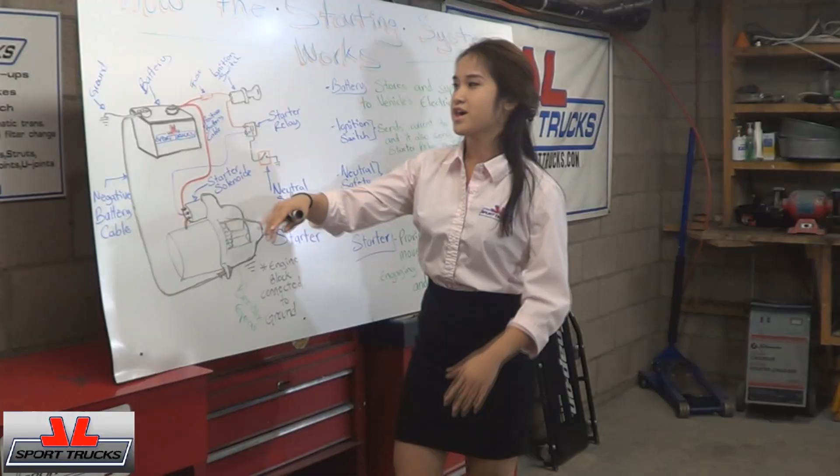This is Jade, and I'm going to be explaining how the starting system works. So first we're going to start off talking about the diagram over here. We have the battery, the ignition switch, the starting relay, the neutral safety switch, the starter, the starting solenoid, there's going to be the Bendix gear, and then of course the negative and the positive battery cables, and there's going to be the thicker one and the smaller one that we're going to be talking about.

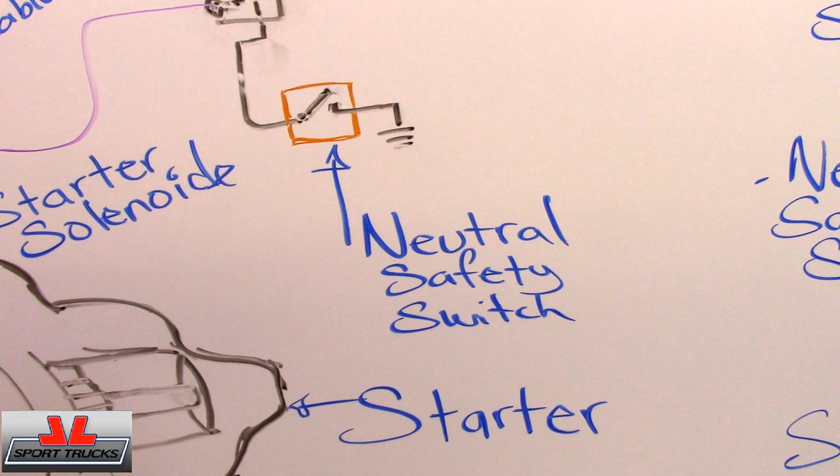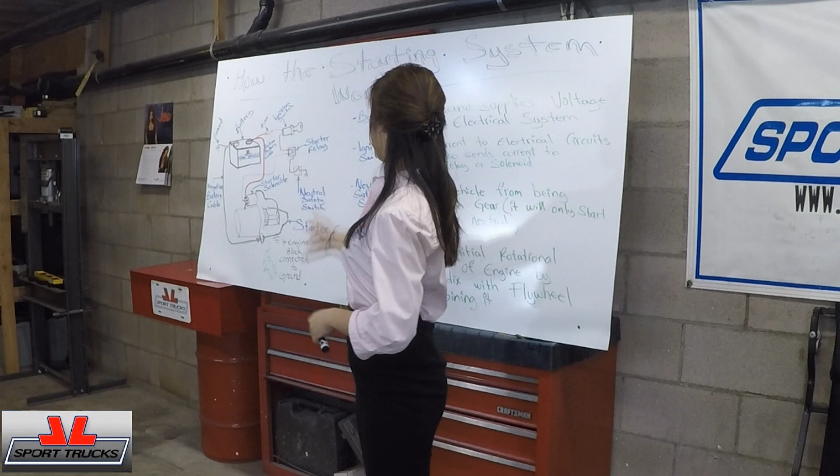So moving towards explaining what each part is, the battery stores and supplies the voltage, but it also connects to the vehicle electrical system. Next is the ignition switch, which powers on the car and accessories, and then it also brings power to the starter.

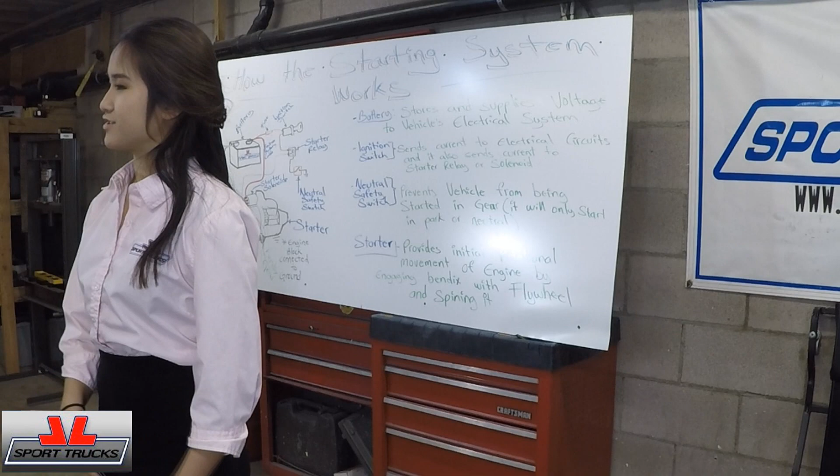Next will be the neutral safety switch, and it's supposed to prevent your car from starting when it's in gear. For example, if your car is automatic, you won't be able to start until you are in park or neutral. But if you're in manual, you won't be able to start until you push the clutch in. The last part, which is the most important part, is the starter, which provides the initial movement for the engine to start. So going to the diagram, I'm going to be explaining a little bit more how it all works.

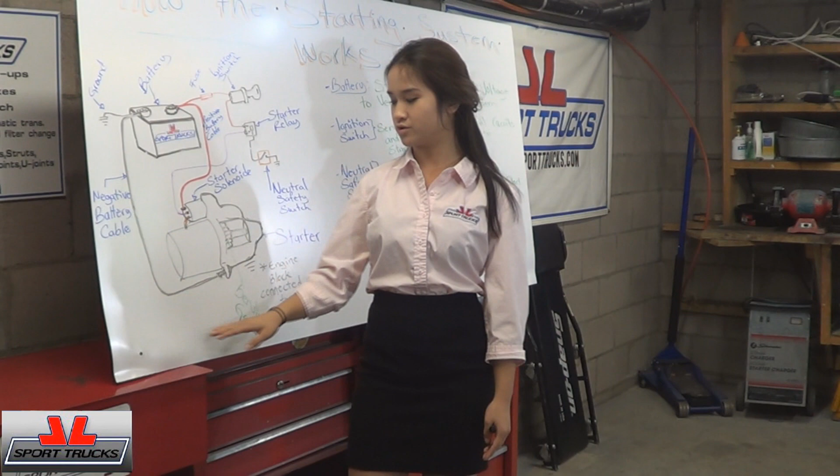For the battery, we have the thicker negative and positive battery cables, and they both connect to the starter in different places. Following the small positive cable, it leads to the ignition switch, and when you crank your key, it will send a signal towards the starting relay. But it won't start because it needs a connection which is connected to the neutral safety switch.

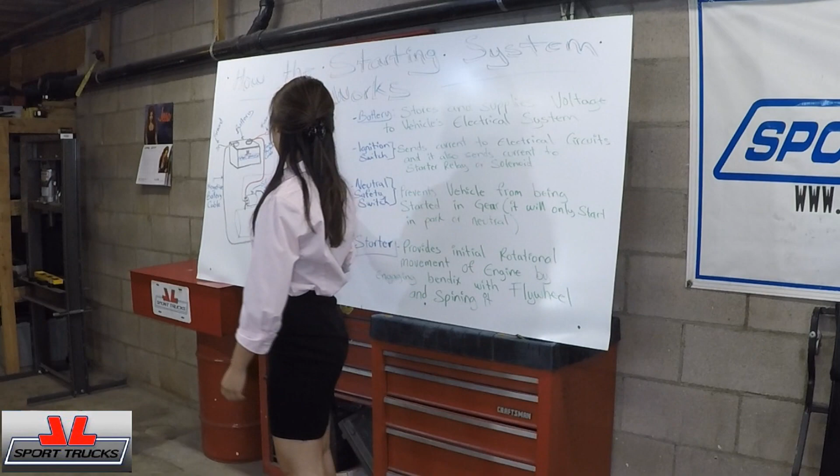To close the neutral safety switch circuit, for an automatic you have to be either in park or neutral, like I said, or if you're in a manual, the clutch has to be pushed in. When the circuit is closed, it starts another current that flows towards the starting solenoid. The bigger cable will always have power, but the little one will not have power unless you start the engine.

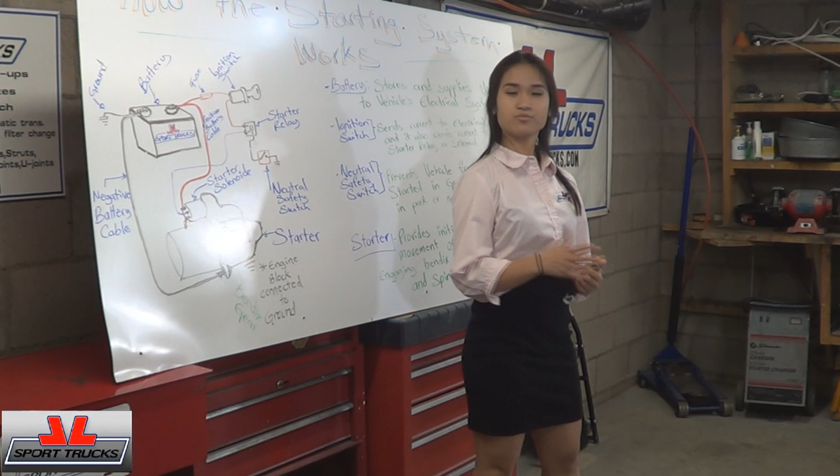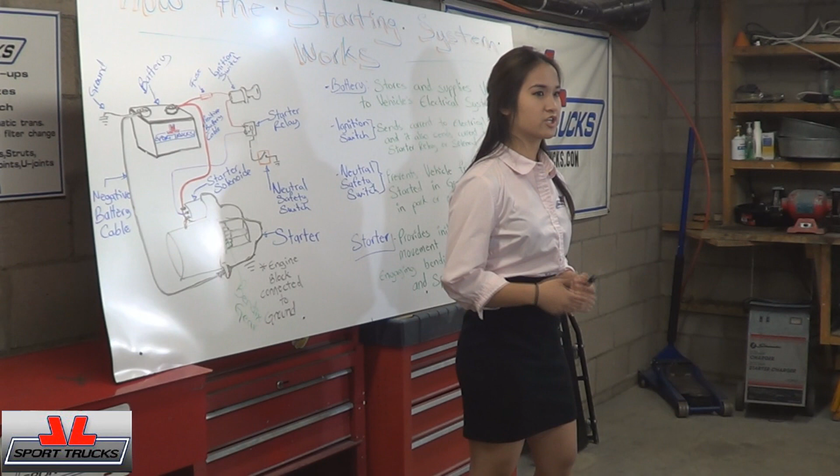When there's power to the starter, it will start the Bendix gear, and it does two things. It starts spinning and then it pushes out, which will engage the flywheel. A good example to illustrate what it does is like a cuckoo clock or a watch with its gears.

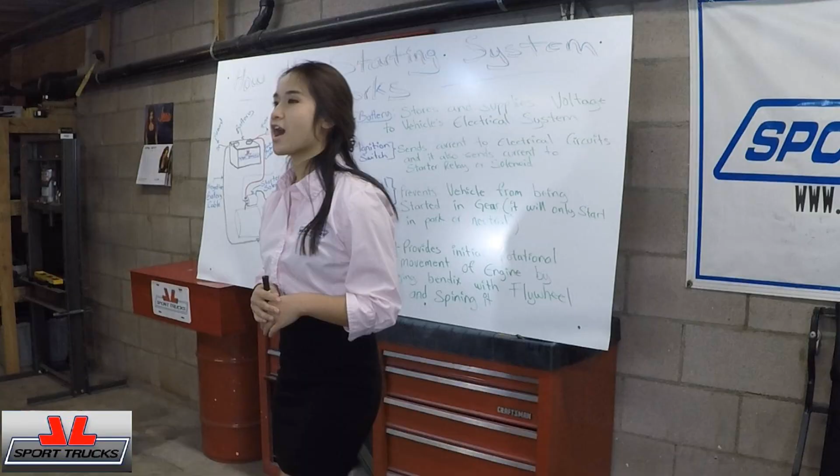I think we're really grateful to have this system in our cars because back in the olden days, picture yourself in a black and white video. To start your car back then, you actually had to rotate a handle by hand for it to start, even if it was raining outside your car. With this system, you will be in your car. So we are very blessed today to have this. Like I said in my last video, history is really important, and I think knowing cars and how they evolve is also important.